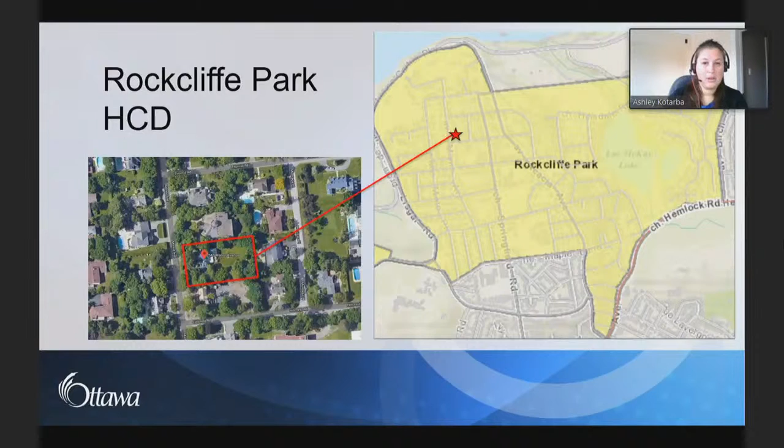Good morning, everyone. The first application before you is to alter 540 Manor Avenue, a property designated under Part 5 of the Ontario Heritage Act and located within the Rockcliffe Park Heritage Conservation District. The property is located on Manor Avenue between Thorold Road and Hillcrest Road, situated in the northwest part of the district on a large lot. The property features a semicircular driveway, pine trees along the front property line, and an English cottage style house. This is a Grade 1 property within the district.

The house was built circa 1925 and designed by Alan W. Horwood. It features a steeply pitched roof, painted brick and stucco cladding, multi-pane casement windows, and two tall chimneys. Over the years, numerous changes and additions have been made to the building, including the frontispiece, a new garage, and the garage link, as well as additions to the side and rear of the house.

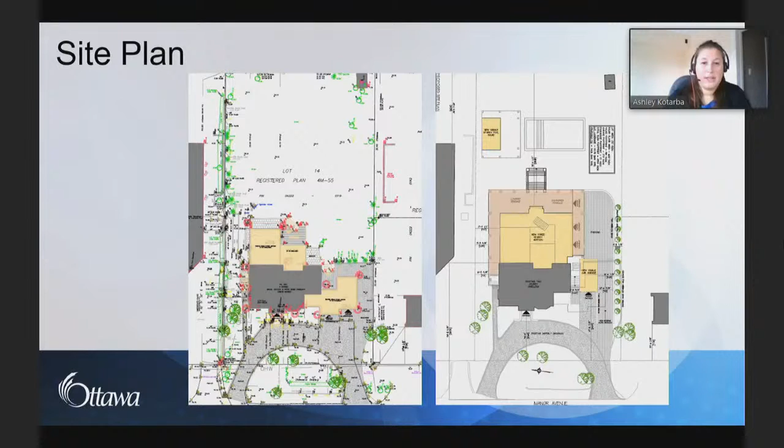The application today includes the removal of all additions and the construction of one new addition to the rear of the house. Here is the site plan: on the left is what is there today, on the right is what is proposed. The original form of the house is colored dark gray, and the yellow areas are the additions, including the garages. On the left, the yellow areas will be removed, and on the right is the proposed addition. Note there will be a detached single car garage next to the house, and a veranda, colored in beige, that wraps around the back and sides of the house.

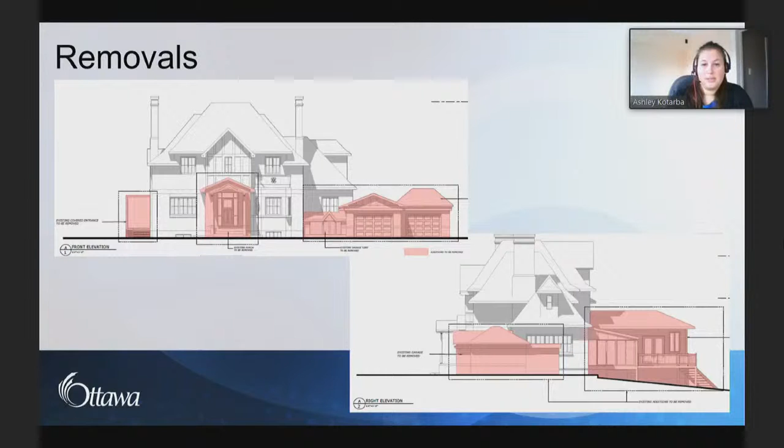These elevations on the front and side of the house show the areas that will be removed as part of this application. These include the frontispiece, the garages and their link to the house, as well as the side and rear additions.

Here's the proposed left and right elevations. The new addition will be to the rear and take design cues from the house in terms of massing and materials. The addition will feature a steeply pitched roof with a height lower than the existing house. It will be clad in stucco and have multi-paned windows. The new addition will include living space, a wraparound porch at the rear and sides, as well as a below-grade 3-car garage. A single-car detached garage is also proposed.

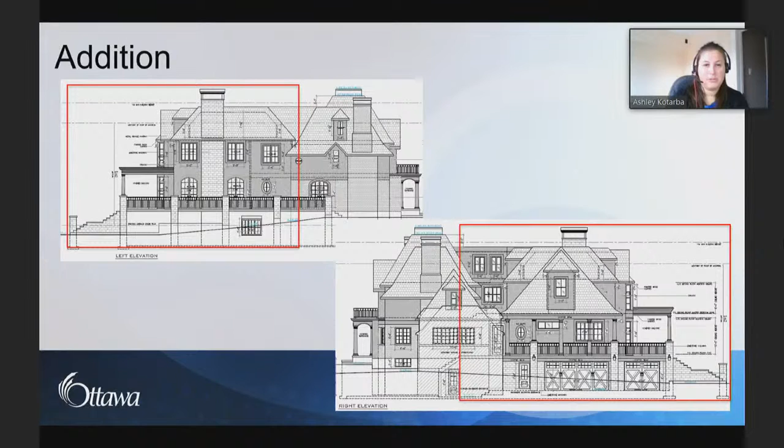Next slide, please. Here are the renderings of the front of the house. With the additions and garages removed, the house in its original form retains primacy on the lot and maintains the main focus. Other elements of this proposal include the removal and replacement of the front canopy, the replacement of the windows, as well as the reshingling of the roof with a new metal shingle.

As part of the overall cleanup of the building, the applicant has agreed to explore opportunities to remove the paint from the brick. A test patch will be done in a discreet location to determine if this is feasible.

Next slide. Here are the views of the rear of the building showing the addition and the veranda.

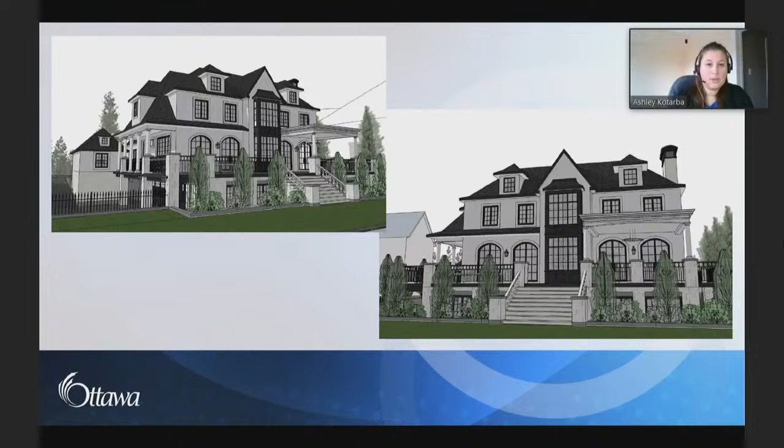Next slide. The proposed landscape plan includes the retention of the semicircular driveway, the creation of a new reverse slope driveway, as well as a pool and accompanying pool house in the rear yard.

Since the addition will be generally in line with the existing house, the side yard setbacks will be maintained and in some areas increased. The front yard will have a reduction in hard surfacing since the existing 2-car width driveway leading to the 2 single-car garages will be narrowed to accommodate a single-car garage.

No mature trees will be removed for this application. Only 1 tree is proposed to be removed due to poor health and is circled in red on the plan.

The front cedar hedge will be replaced with new cedars, and a new cedar hedge will be planted along the side property lines as indicated by the green contouring.

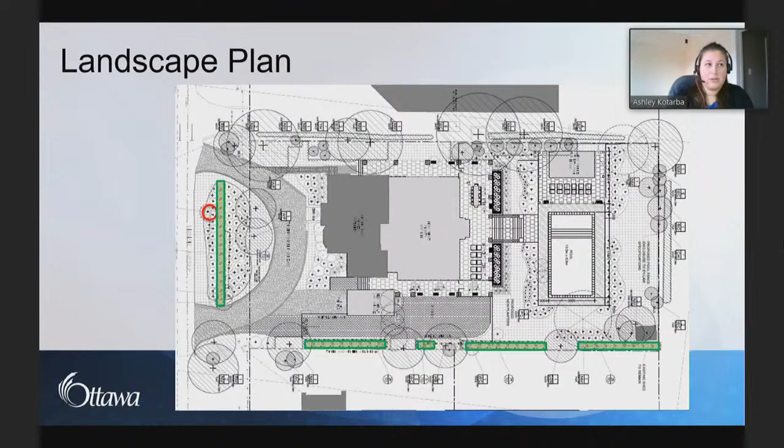Next slide. As a property located within the Rockcliffe Park Heritage Conservation District, this application is required to meet the guidelines in the plan. The applicable guidelines relate to altering grade 1 properties.

Additions should be of their own time, lower than the original structure, clad in a compatible material, subordinate to and distinguishable from the house. Standards 1 and 11 of the Standards and Guidelines for the Conservation of Historic Places in Canada are both applicable in this application.

The heritage value of the house and district will be maintained, and the new work will be physically and visually compatible with, as well as subordinate to and distinguishable from, the original house.

The roofline of the addition is lower than the existing building, is set back from the front facade, and is clad in materials that reflect the character of the original house and are typical of the area.

Although somewhat similar in expression, the addition is distinguishable from the original house since it is stepped back from the front, has a lower roof, and is set back on both sides, providing a visual break between old and new.

The house will remain compatible with the heritage attributes of the HCD in terms of its form, massing, overall height, setback, and dominance of the property's landscape setting.

The proposal will also rehabilitate an existing house that requires repairs. A cultural heritage impact statement was also completed for this application.

The report found that the addition respects the orientation, site setback, and height requirements outlined in the HCD plan, as it retains a relationship to adjacent buildings, respecting the cultural heritage value of the streetscape.

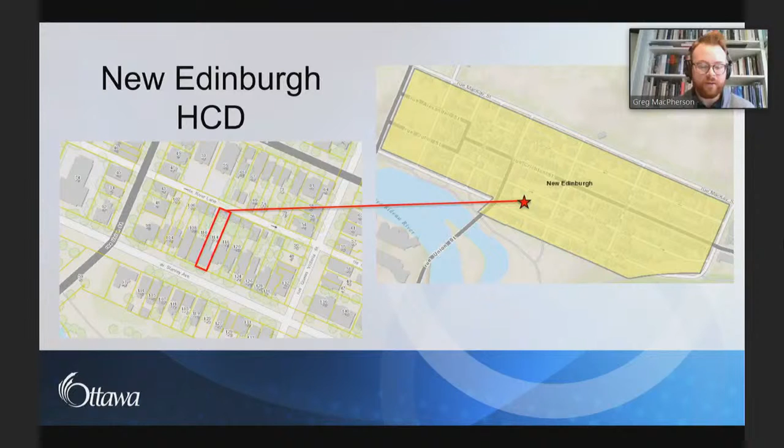The subject application relates not to the main dwelling on the property, but the detached garage, which fronts onto River Lane at the rear of the property. This garage is believed to have been built at approximately the same time as the main dwelling.

The intent of this project is to demolish the existing garage and reconstruct a new detached garage with nearly the exact same form, scale, and materials as what exists currently. As part of this project, a concrete foundation will also be poured for the garage to sit on.

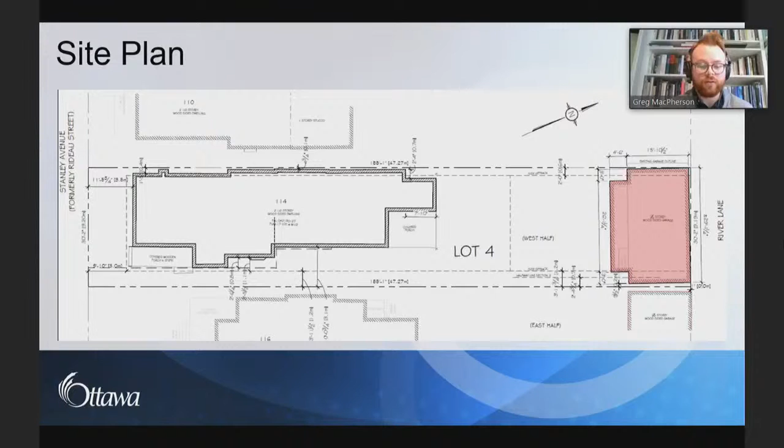This is a zoomed in picture of that proposed garage. Highlighted in red here is the approximate outline of the existing garage.

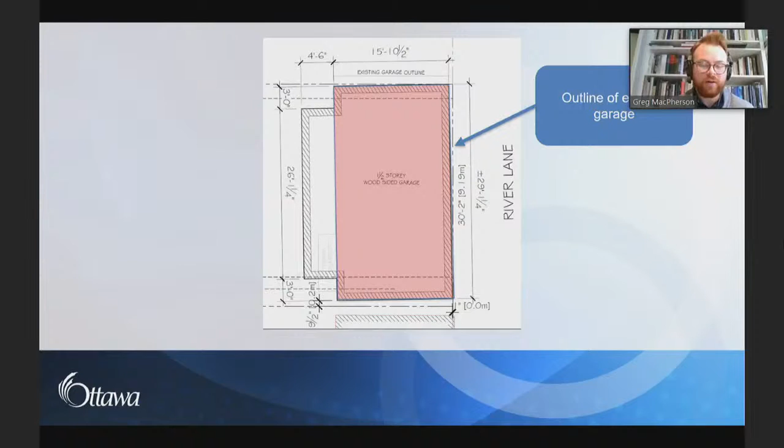Tacked on in green here is the proposed extension. This proposed bit is a bay entrance, and it will be facing the existing dwelling and not visible from River Lane.

Because of this increased size, 3 variances are required, primarily in relation to the heritage overlay, just to permit a slight addition in the volume and floor area of the property. The variance process will be undertaken following the heritage permit process.

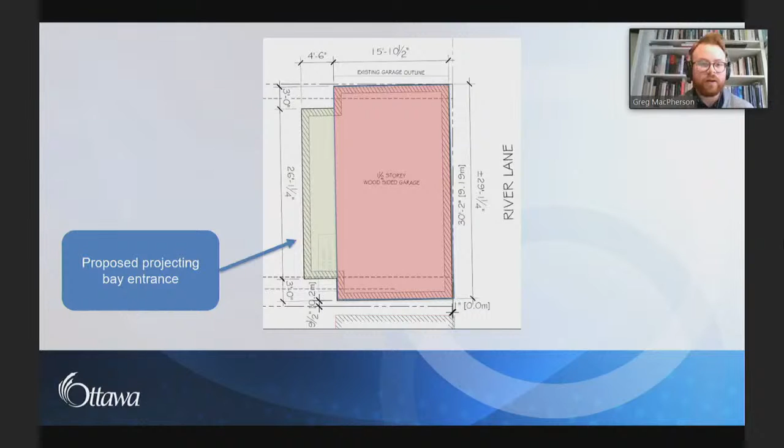This elevation shows the proposed elevation from River Lane. The most notable difference between the existing garage and the proposed garage is the new carriage style garage door, which is approximately twice the width of the existing garage door. Again, the board and batten here will be a mix of salvaged siding as well as new board and batten siding that is stained to match.

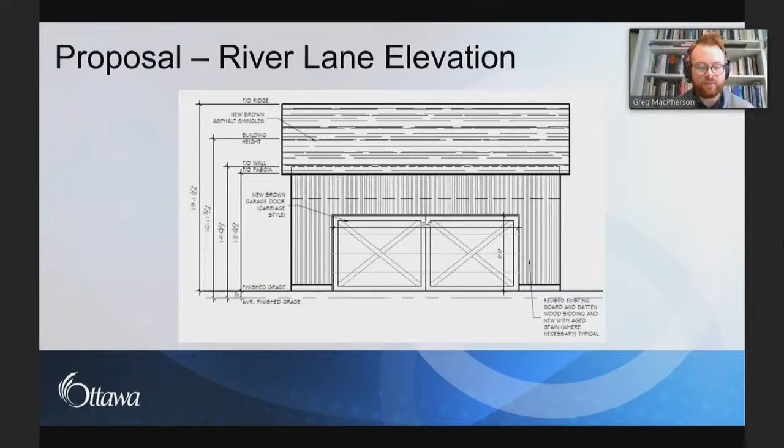This slide shows the elevation facing the house towards Stanley Avenue. You can see in the middle there is the projecting entrance that's proposed, as well as a dormer above that. The windows and doors here will be salvaged from the existing garage if possible. This dormer and bump out are not visible from River Lane, due to the width of the lot and the width of the garage.

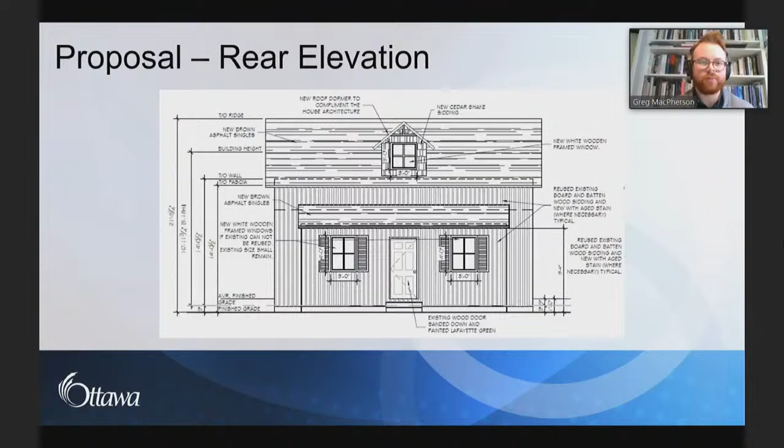Again, you can just see some of the elevations here. These windows will also be salvaged if possible.

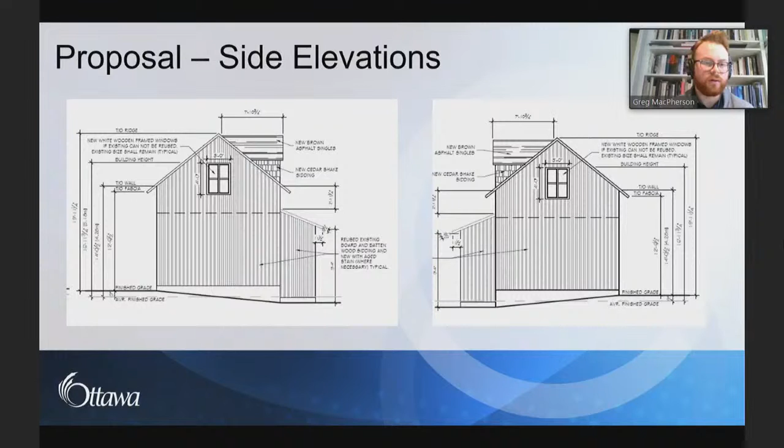And here are some renderings which have superimposed the proposed garage within images of the existing River Lane. As you can see, the form of the garage is relatively identical to what is existing. The most notable difference being that double garage door.

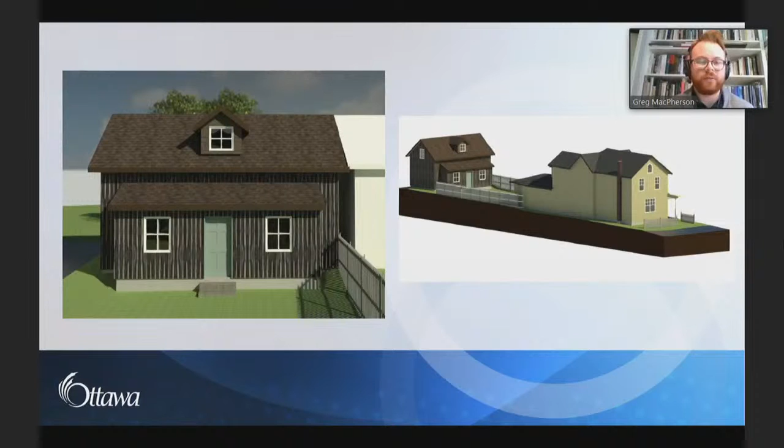And here is just a view of the proposed rear of the garage. So this would be if you were standing within the backyard of the property. This is what you would see here. All right, next slide.

So, applicable guidelines and policies. As this property is located within the New Edinburgh HCD, any alterations are required to conform to the policies of the New Edinburgh HCD plan. The specific guidelines that relate here are the guidelines for garages and accessory buildings, as well as the guidelines for laneways. So the garage reflects these design requirements by incorporating a gable design and using wood cladding, which is sensitive to the surrounding HCD.

Similarly, the laneway guidelines require that new accessory buildings be simple in character and reflect the character of other garages. There are no specific policies within the HCD plan for the demolition of accessory buildings, but salvage and reuse is considered good practice in relation to any demolition of contributing buildings. So we are supportive of the reuse of some of the materials here.

As well, standards 1, 10, and 11 of the Standards and Guidelines for the Conservation of Historic Places in Canada apply, maintaining certain character while reusing some of the existing materials. So overall, the proposed garage is complementary to the character of the existing HCD and is supportive of the New Edinburgh HCD plan guidelines. Next slide, please.